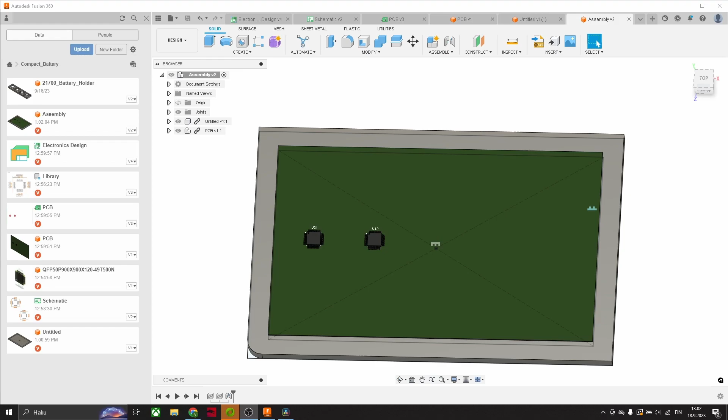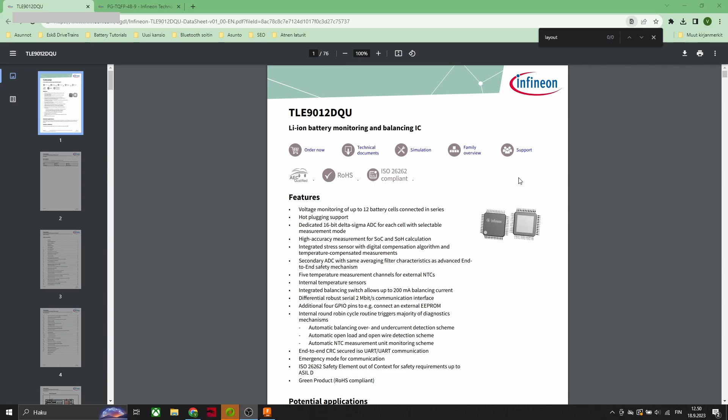In this video we will create an electronic component that we can use in electronic designs in Fusion 360. For this video I'm using this TLE battery monitor.

First we have to create a new library for electronics. Then we can add a new component in this library. Let's name this TLE component. And now we can create a new symbol for this component.

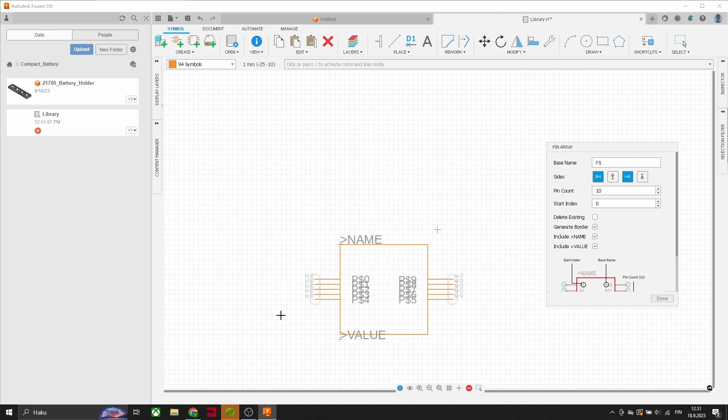Let's add pins for this component. In this document we can see there are 48 pins. Here we can select the side for the pins. Now it uses all 4 sides.

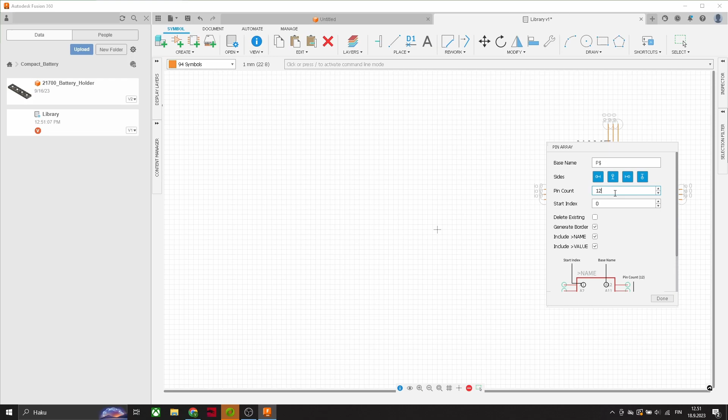We can delete this value text from here. And we can change the name for this component. And then we can save this. So this new symbol is saved in the new library we just made.

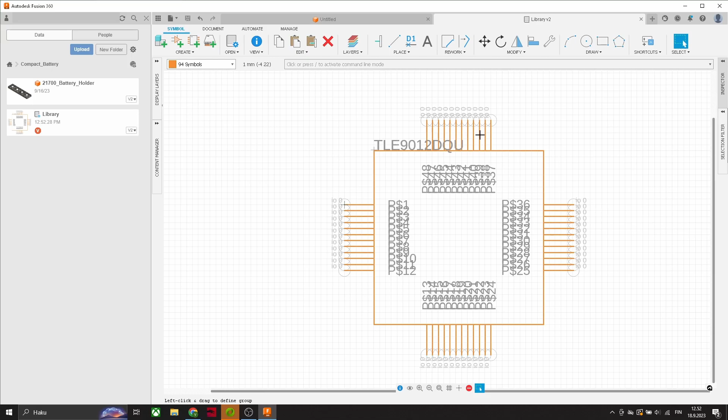Then we can create a package for this component. In Fusion we have this package generator. We can use these values from this document. So these both are 9 millimeters.

This is 7, it's the size of that component. We can use this original footprint and then we just add these thermal pads which are 5 millimeters.

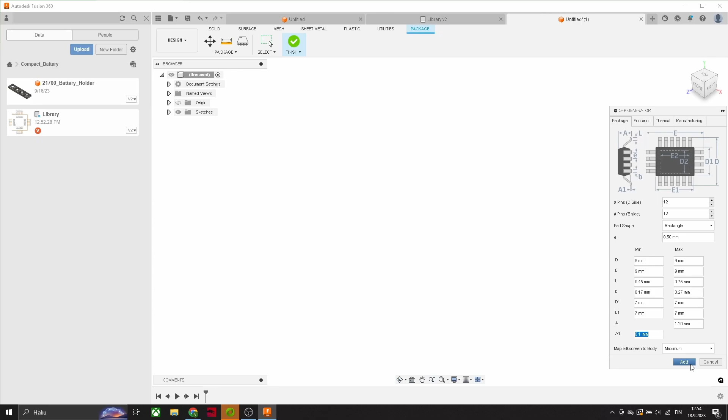Now it's all set and we can press add. So we have this new 3D model and we can save it.

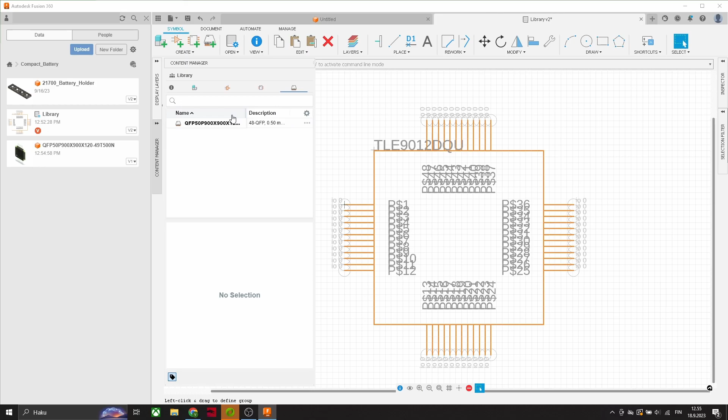Then we can open this content manager and we can see we have all this symbol, layout, package and components in our library. And here we can see there's the footprint and 3D model. So now we can open this component by double clicking it.

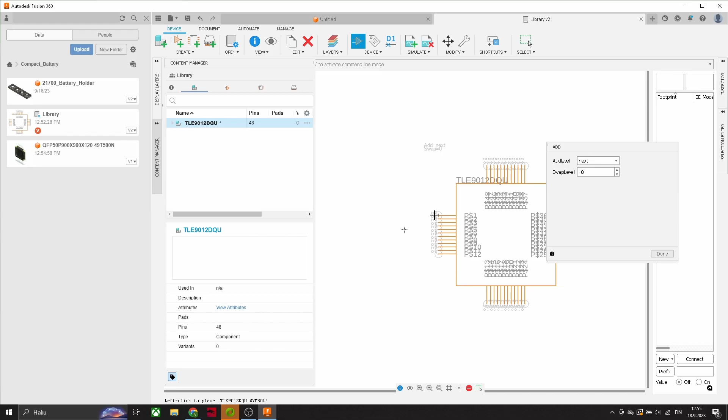Then we have to add a new device from here, and here we can see this symbol we just created. And then we can click here and add that symbol. Now we have this new local package here, and here is this new model we just created.

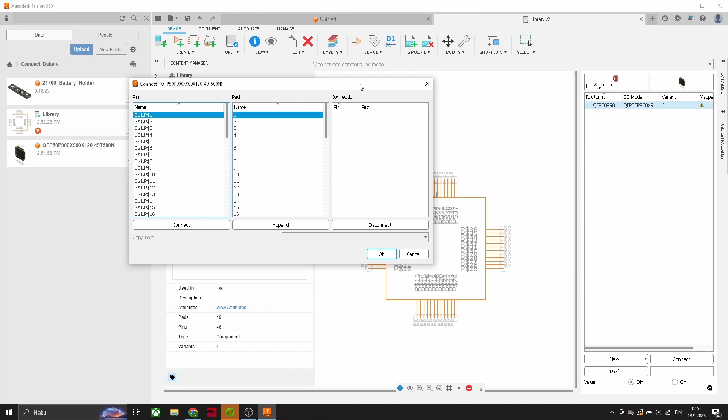And then we can click this connect. Now we have to connect all pins from footprint and schematic to match. For this example we can just hit this connect button. And now we can save this new library again.

So now we have created the library and we can create a new electronic design. Let's create a new schematic. Sometimes Fusion has some problems with updating this, so this time we had to go back to the component and then open the same one again. It has some connection problem here.

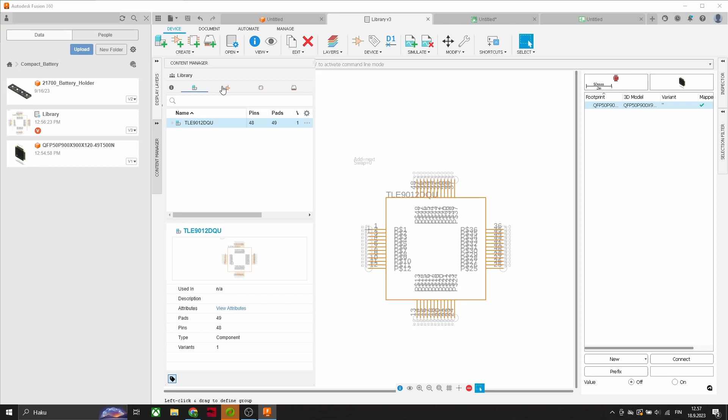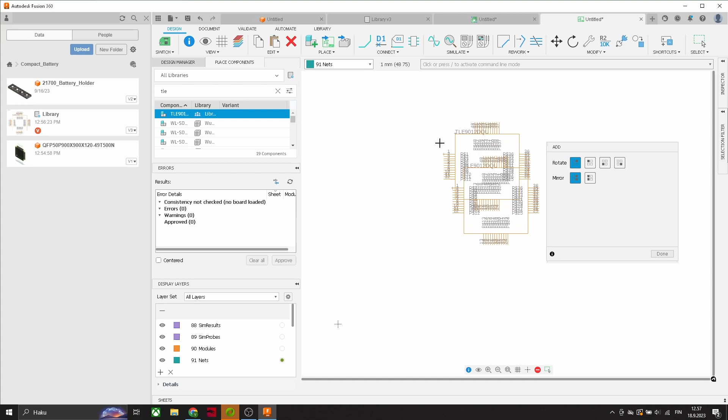Okay, so now it's working again. And here we can see this new component we have created, and we can drag it on the schematic. And then we can again save this, and now we see there's the schematic and electronic design.

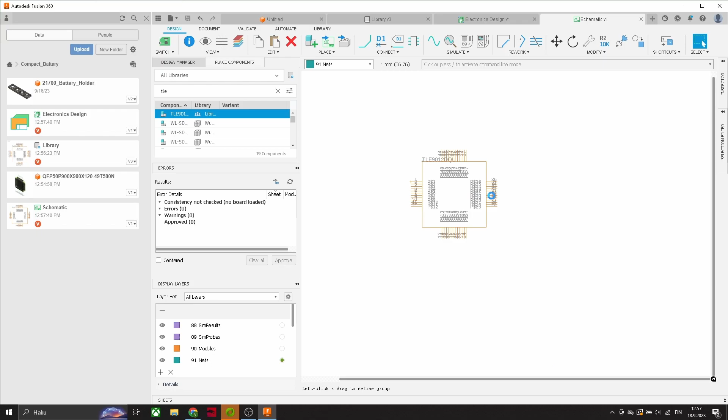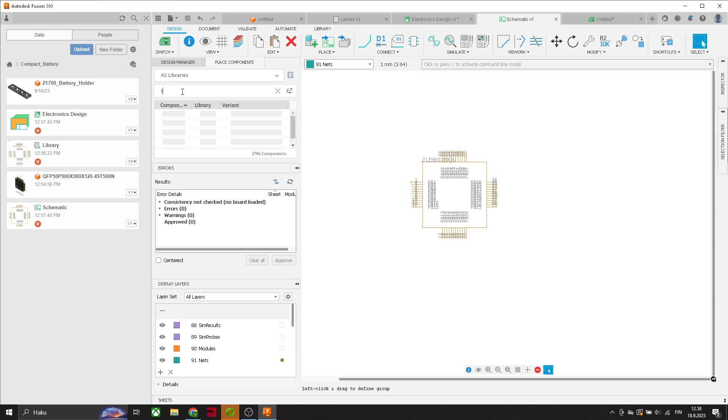And now it has opened this new layout, and we can drag this component here. And we can test this, so we can add a new component here again.

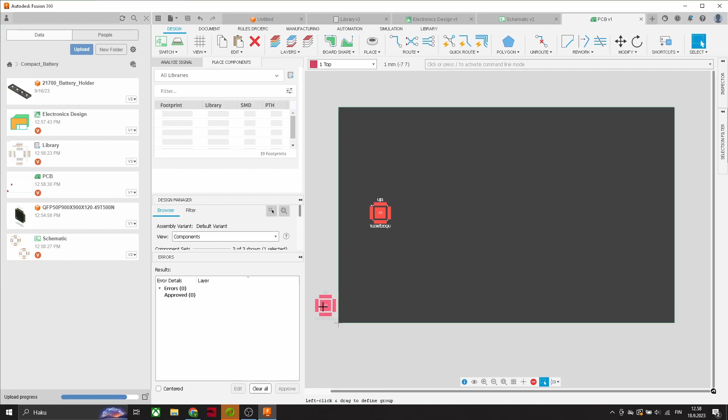Then we can save this, and then we can notice it's updating all these three files here. So Fusion is synchronizing all these files. And now we have this new component here too. And we can save this.

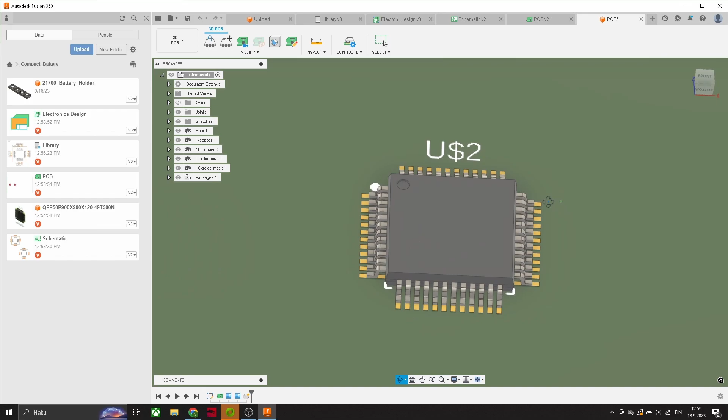And then we can push this 3D model here. And now we have this 3D model of this PCB. And then we can save this new PCB here. And then we can see there's again a new file for this 3D model.

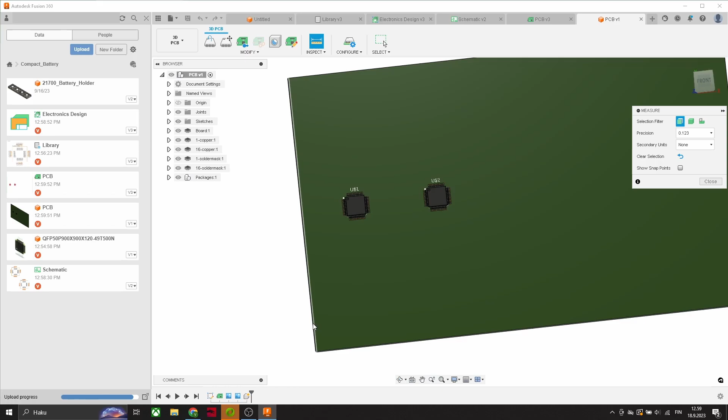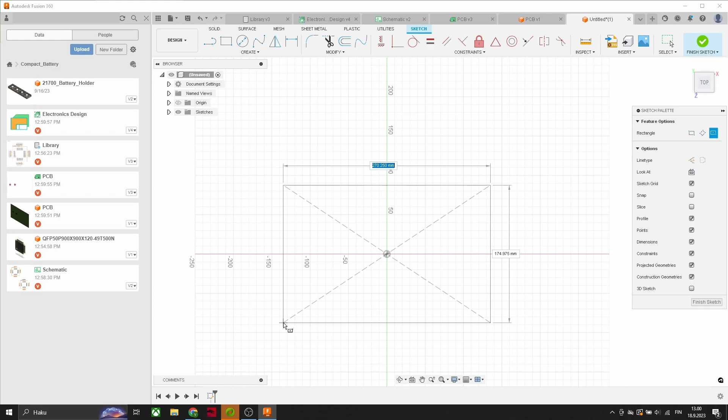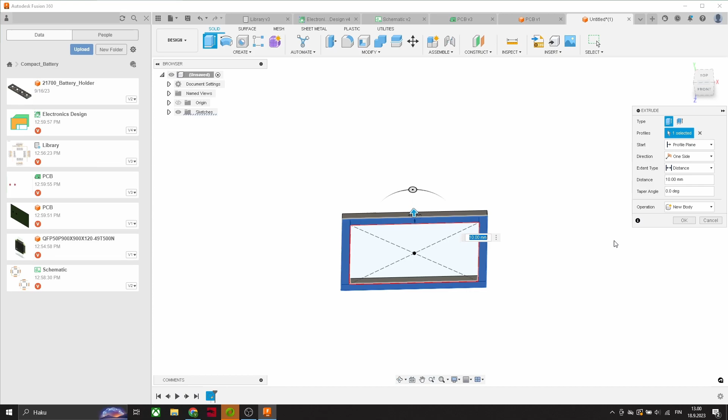And for demonstration we can create a new 3D object here, and then let's save this.

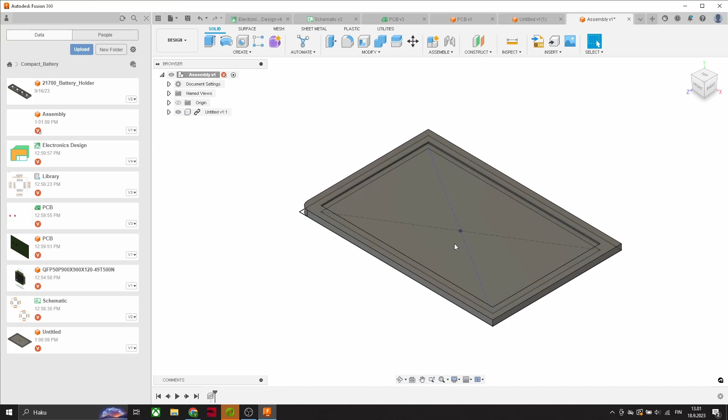Now we can create a new object for this assembly, and then we can drag this PCB holder here, and then we can drag this new PCB file here too. And they are both 3D objects, so we can use this joint and add that PCB here.